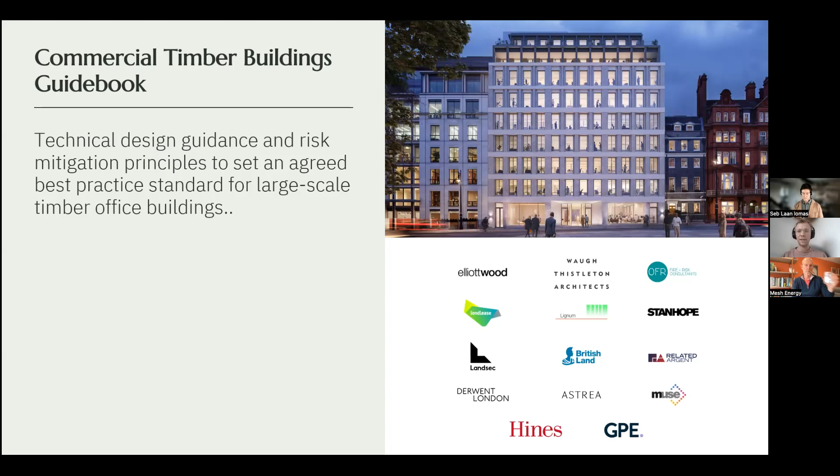What's the timeline for the project, Joe? The design team are currently writing the first draft of the guidebook, and the fire engineers are going through meetings to set out what they can agree on. The guidebook itself will hopefully be published in Q2 next year, beginning of summer. We're expecting a first draft around now, end of October. So hopefully next year that will be available to use. But the process of getting agreement and endorsement usually takes longer than expected, and this project on screen is a very good example of that.

I'll talk very briefly about this. This is something that's just been published, actually. It's the new model building guide. It takes a very similar approach to the Commercial Timber Buildings Guidebook, but we're looking specifically at residential buildings here.

This is an incredible amount of technical information and design guidance that's just been released by us. It's on our website, but it was developed by Waugh Thistleton again, with UCL, Gardiner and Theobald, and Buro Happold. Crucially, they've engaged in a process of pre-review with the NHBC, one of the leading warranty providers for residential buildings in this country. This pre-review process took the whole system through a lengthy engagement process with NHBC, and what it's resulted in is a letter of comfort from NHBC that this system, if used, will facilitate developers and housing associations gaining insurance and warranty through NHBC's Buildmark warranty system.

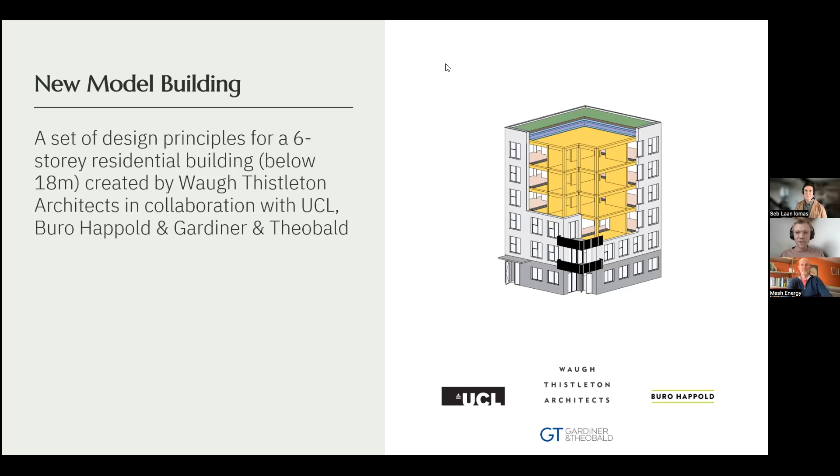Brilliant, can you see my slides? Brilliant, thank you. Okay, well, thank you very much for the invitation to come talk about this.

So I'm wearing a number of hats within the construction industry. At Architype, we've currently been undertaking a lot of research around timber and navigating the challenges that Joe just introduced. As he said, some of them were directly because of regulation, and others were because of the shockwaves and ramifications sent around the wider industry. As a representative of the design sector, we're very aware of how powerful timber in construction can be at displacing those harmful emissions that Joe introduced, and we can only do that if we have the answers to those solutions and those barriers.

And whilst there have been some really great efforts to date at challenging those, we know that a lot more has to be done still, and a lot more urgently.

So I'm going to be talking about fire resistance, which is obviously just one component of the challenge around fire and construction and timber. But the kind of challenge I'm talking about is universal across the whole of construction, across all the sector and all of the use types. It's also a materially agnostic challenge. I'm going to be talking about it through the lens of timber because it's a specific challenge and opportunity, but it doesn't actually matter what you build your building out of. A lot of the challenges I'm going to talk about are prevalent.

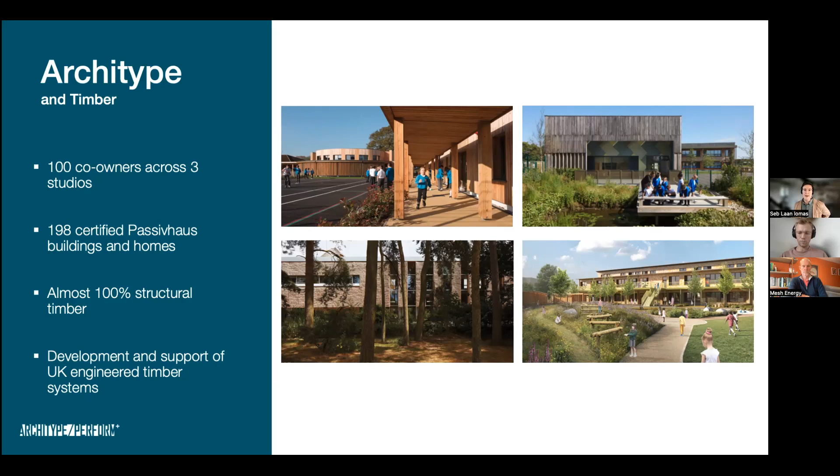Just briefly, for those who aren't familiar with Architype Architects, we're about 100 people now across our 3 studios in Edinburgh, Hereford and London, almost exclusively working on Passivhaus buildings, schools and homes. Historically and still to this day, almost all of our projects are bio-based inside to out - timber frame, either frame construction or mass timber, with bio-based insulation like cellulose, ideally local untreated timber cladding like some of the projects you can see in this photograph, or thatch, reed, and then natural bio-based plasters on the inside.

So this is my provocation of the day, and I'm going to be giving my own personal commentary on this. I've got to say, I'm an architect by training, I'm not qualified with regards to fire, but it's something that as a team we've been looking into. So I very much welcome any kind of questions or challenges after my presentation about knowledge base or anything like that, and I'm looking to learn from everybody in the industry, as I know you all are today.

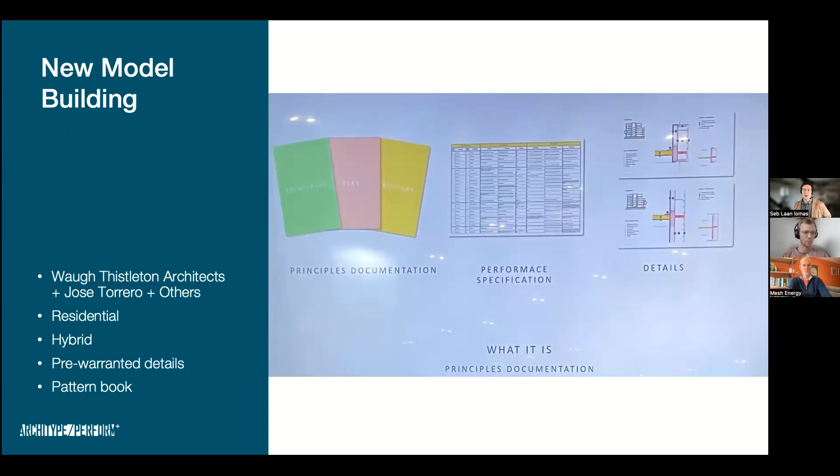So some positive progress in the industry - Joe talked about this already. I really, really recommend you have a look at it if you haven't already. It's very well communicated, very accessible, and a really good solution to the challenge at the moment. As Joe said, it's unfortunate that we do have to be encapsulating timber at the moment, but it does at least enable us to displace other materials. So it's a solution for the time being, and hopefully moving forward we can rely more on alternative strategies.

Something else that Built by Nature have also supported recently is the wonderful mass timber insurance playbook. Again, if you haven't looked at this, I highly recommend it. It's authored by 2 experts from the insurance industry, and it maps against the RIBA stages how design teams need to acknowledge the concerns of the insurance industry, and in the words of one of the authors, court the insurance market so that they can negotiate a reasonable insurance strategy for a project. It was beta tested on a mass timber school that even had quite a lot of exposed CLT, and they were able to secure insurance without a premium, whilst before this playbook existed, they were not able to afford the insurance that they were being offered by the market. So it's really good to see this in the market, and I recommend trying to deploy it on your project.

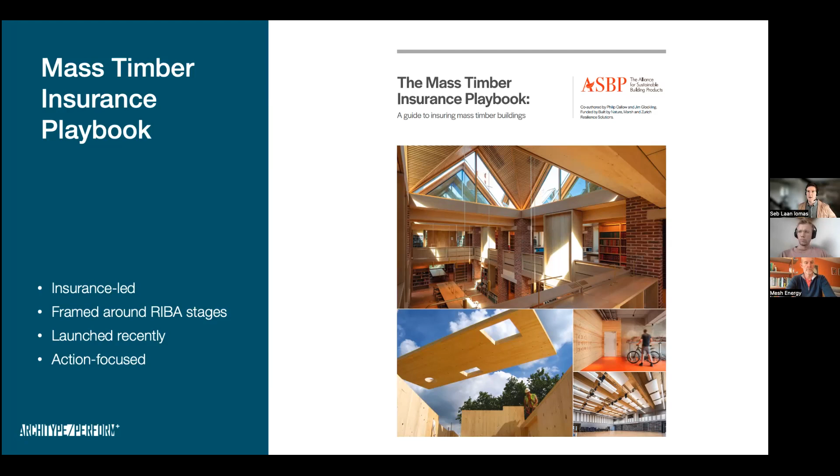And also there has been some really great testing that has been undertaken in the last couple of years, the largest of which has been led by Arup. All of this information is available online. They've got a lot of academic papers which have studied how the CLT performed in the fires, including some videos, which I highly recommend watching from a designer's kind of acknowledgement of the risks and challenges when using combustible materials. But it also positively demonstrated some really powerful successes from where encapsulation was used at preventing the combustion of the exposed surfaces.

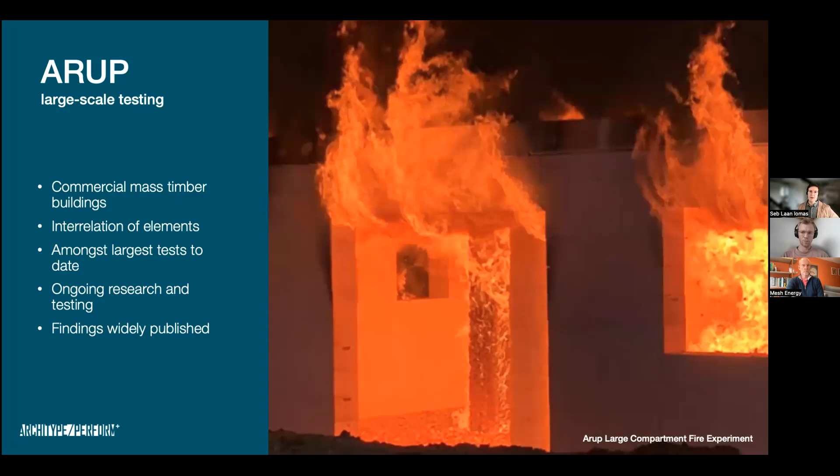So I think it is absolutely right that the construction industry has been shaken to the core in the way that it was after the Grenfell tragedy.

Joe very well explained the challenges that rippled through the industry that we're still challenged with. I think positively, the insurance market is in a better place than it was even 6 months ago, and that's really good. But it's still a significant challenge, and what I'm going to be talking about has really yet to be grappled by the construction industry, in my opinion.

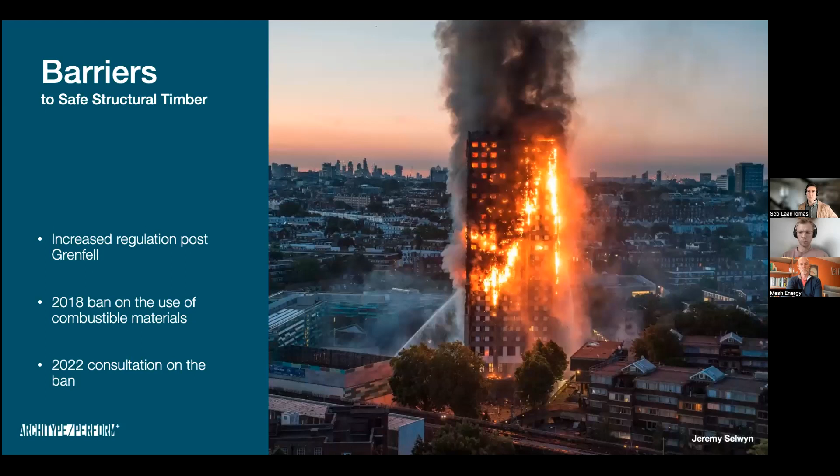So those who work in construction, I know that half on the call today are architects. You'll probably have first-hand experience of how challenging it is to get your hands on fire certificates when you're trying to design a project. And at Architype, we've learned that these REI certificates, or fire resistance certificates, are highly, highly prescriptive.

When we've gone to project engineers to talk about the challenges with achieving the FR rating they've prescribed for the project, they're typically not willing to engage with us on design matters and how we're actually going to achieve those targets. We've also found that suppliers and manufacturers can be very hesitant on disclosing the fire certificate information due to perceived concerns around intellectual property, for example.

We also know that the concrete and steel industry have had a head start on the timber industry, with 50 years of really extensive fire testing investment, which has allowed them to do more extrapolation on the anticipated behavior in applicable scenarios. So this is a bit of the context of the challenge we've been dealing with as designers.

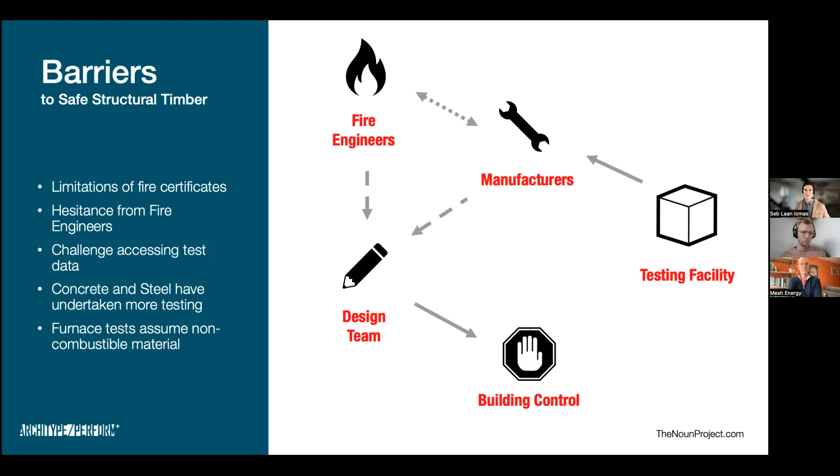Obviously, we've also had the Building Safety Act, which came into force this month. And as we all know, a really important component of that is the golden thread, to help safeguard the continuity of our design intentions and information through the long processes we always go through on our projects.

However, in my opinion, that's predicated on the availability of robust data. And our research has unearthed that the industry really is a long way from currently being able to achieve that when it comes to fire performance and certification.

I've got a provocation really as to whether England and Wales building control aspire to currently stepping up to match the levels that we've seen in Scotland with regards to scrutinizing this information. I think only time will tell if they're going to do that, because Scotland is ahead of the game at the moment.

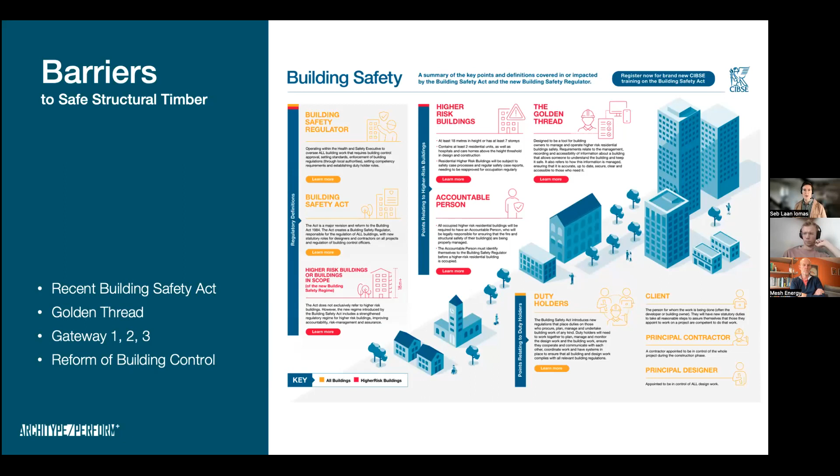So I'll briefly take you through our recent journey at Architype, which was instigated by a project of ours in Scotland. It's a 2-story primary school, timber frame, bio-based composition all the way through, achieving Passive House certification. And building control asked to actually see the specific fire test certificates, not just relying on the statements from the suppliers, which we would normally forward with project packs that we've received from suppliers.

So we requested and reviewed the test certificates that were sent by the suppliers. Some of them didn't have them initially, and it took 6 months for them to send us certificates. And then when we did look at them, it was effectively opening Pandora's box.

So I'll summarize the 18-month journey in the rest of these slides. As a practice, we know that we still don't have all of the answers yet, and we're ongoing with our research. But at least we found a strategy for moving forward at the moment, which we're confident in.

So at first, when we opened this can of worms, we thought we must have just been misreading the facts. But our findings have been confirmed. We went to everybody we knew in the construction industry and the timber industry and building control, government working groups, and our findings are correct.

And it's alarming. But as I said, it's not just timber specific. These challenges do apply if you're building out of light gauge steel or other construction materials, which is useful in one component, because it means clients can't just say, well, stop building out of timber and use another material. But it means that it really does threaten the whole construction industry.

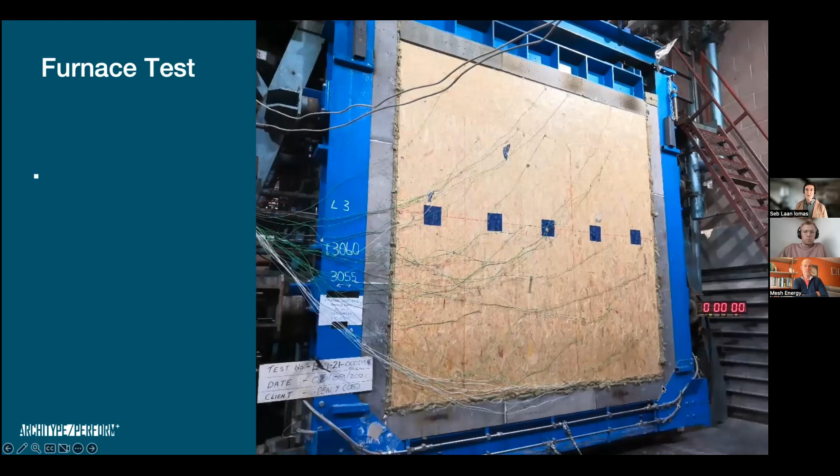And there are lots of other challenges as well. They all come with a use-by date of 5 years, after which they expire and should be reevaluated. The tests also rely on a standard temperature curve within the test chambers, and challengingly, the inclusion of a combustible material is an additional fuel source, which augments that temperature curve, leading to added complexities about the fundamental concept of a furnace test.

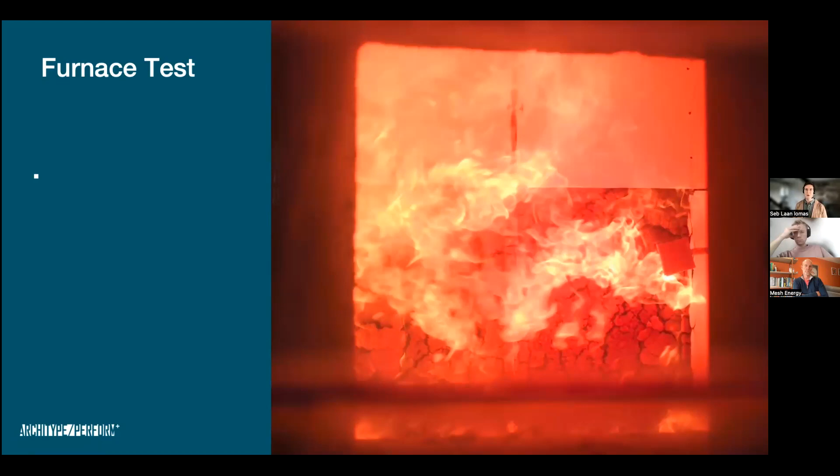And as noted earlier, the certificates are highly prescriptive. They set out the total height they can be used for, and also loading. So if you've got a domestic loading with like 12 kilonewtons per stud, and then you're trying to use it on a school or commercial building where it might be 30 kilonewtons a stud, you can't do that.

It's no longer working within the parameters of the certificate. It prescribes the arrangement of the build-up, so you can't change the order of any of the elements. It stipulates the dimensions of the components, and typically they're also product specific, so you wouldn't be able to swap from one manufacturer's product to another. They come with a use by date, and frequently we found they reference out of date standards, like British standards that are no longer meant to be referred to.

And to be able to understand all of these prescriptions, you actually need the original test certificate rather than just a guarantee from the manufacturer that it's going to be okay for your project. We found it can be exceptionally challenging just to get that information from the supplier or manufacturer. Sometimes they come with NDAs that we have to sign, which means we can't share it with anyone else in the design team or the client.

But there are some really good examples in the industry. The STA has been undertaking extensive testing regimes on some build-ups, which is available to its members, which is really positive. Because they've undertaken a range of tests using lots of different suppliers' plasterboards, for example, they've actually got product agnostic certificates, meaning you can use that build up without needing to sign up at stage 2 or stage 3 as to who's going to be supplying your plasterboard. But those are much more expensive to commission, so in general they don't exist.

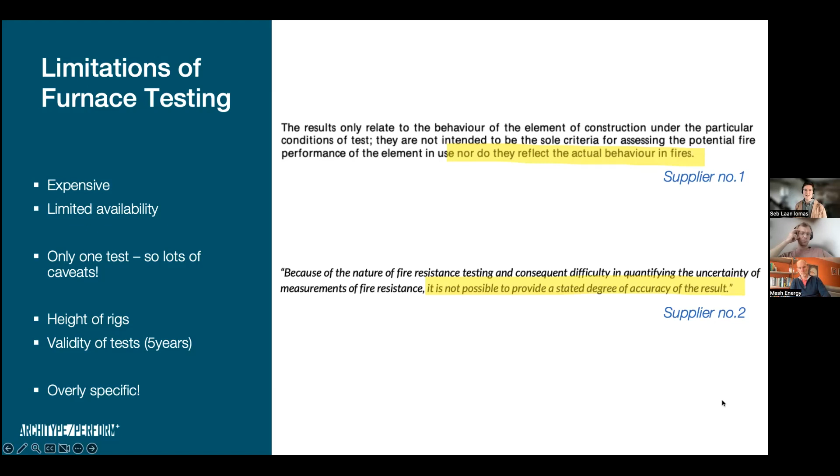So we've found that at the moment, in general, UK projects proceed on the basis of these certificates with all of these variations against these prescriptions, knowingly or not. And therefore, there's a huge amount of inherent risk being carried in projects.

So if you've got those variations and you want to do something about them, one of the options is desktop assessments. These are used to demonstrate the acceptability of those variations against the certificate or not. In general, these are infrequently commissioned by project teams because firstly, your construction detail needs to be based on an original certificate, which means you also need that original certificate. The assessment is then done by a certified fire test lab, and it costs around £5,000 and 6 weeks per detail that you want to look at.

And in Scotland on this project, they had 3 details that they wanted us to demonstrate. Also, the findings are a qualitative judgment on variations, not calculation based.

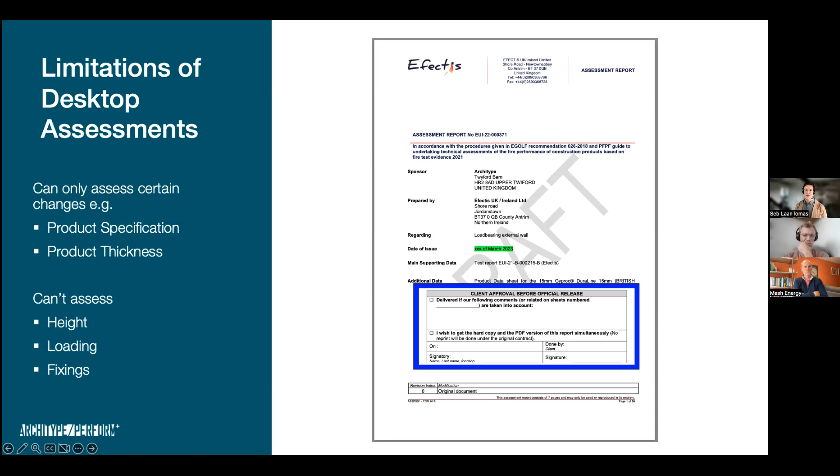So you've still got inherent risk there, and they may or may not be accepted by building control authorities. Fundamentally, they are unable to address a few key variations. It cannot comment on height changes. So if you're trying to build 4.5 or 5 meters, which might be in your stairwell or a double height space or a ground floor in any office building in London, it can't comment on that. And if you're changing the loading, it can't comment on that.

So in our opinion, it doesn't offer a satisfactory resolution for a project. So those are two options which the industry does use. The second, not as frequently as the first, but there is an alternative school of thought, which I'll refer to as calculation-based. Some refer to it as one aspect of performance-based. And this uses real-world material properties and real-world fire test data.

And guidance for doing this is offered via Eurocode 5 or the British Standard 1995 1.2. It can avoid the need for commissioning any furnace testing, provided sufficient data exists. But there are also restrictions with the current applicability of Eurocode 5 in the UK. This is being revised at the moment, and that may restrict the acceptance of it by building control and your insurers. We found it to be okay, but just to note that. There's an update of Eurocode 5 in the works at the moment, which is seeking to get greater acceptability of this standard within the UK.

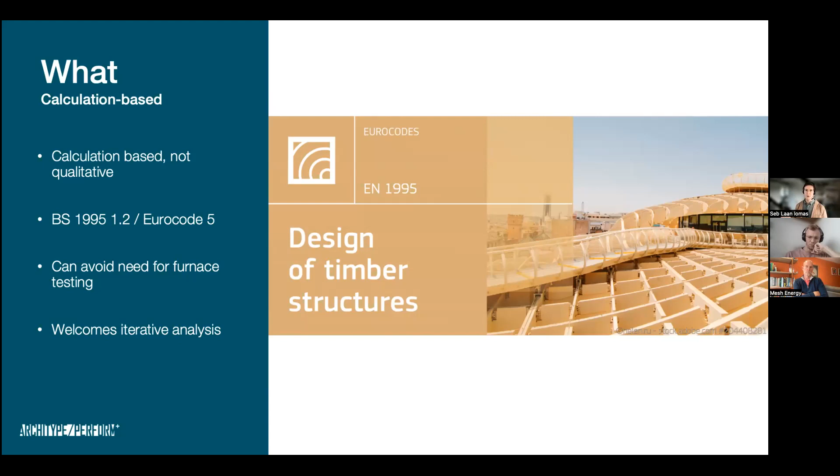And importantly, it allows for iterative calculations during a project. So you can do the first calculation at stage 2 or stage 3, got your details, you know it's going to be okay. And then at stage 4, maybe you're speaking with a subcontractor and they're suggesting they want to change the order of something or change the material specification. You can rerun the test and demonstrate if that's going to be okay or not, which is hugely, hugely powerful. So it's a prevalent process on the continent, relatively new to the UK.

Internally, we've developed this flowchart, which represents the different stages of how a model is created to represent the original test data, known as the validation process. And then the model is amended to represent the design intent, what you're actually going to be doing, and that's known as the verification process. The calculations then demonstrate if the proposed solution achieves the required REI durations, and also by what margins, which is quite important.

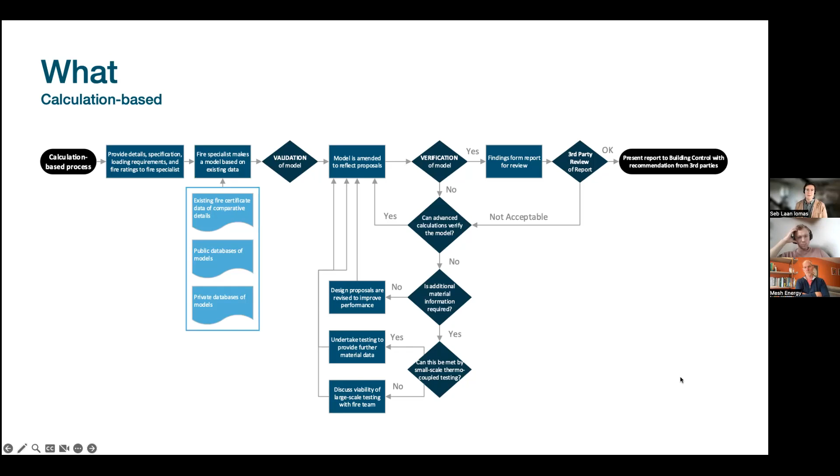And it can result in material generic solutions, which would allow you to swap out different supplied materials at a later stage, which we think is hugely beneficial to the industry and procurement processes. So we've now undertaken this process for the school that I mentioned. We're really satisfied by the outcomes of it and the robustness of it, as are the client and also building control. We're confident that we can efficiently implement this workflow on future projects.

Interestingly, all of the details, which were typical details from all of our previous projects that we keep on developing, they were all demonstrated to overperform from a fire perspective by such margins that optimization could actually be possible to reduce the amount of materials that we're using while still surpassing the required fire resistance, which is really positive. And you wouldn't normally get that with a normal certificate route or a desktop assessment. And positively, our PI insurers are also happy with the workflow that we've developed, which is a really, really good sign.

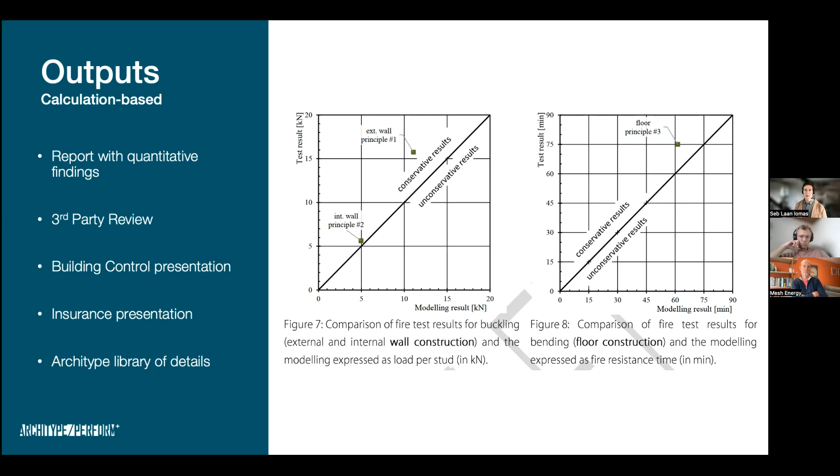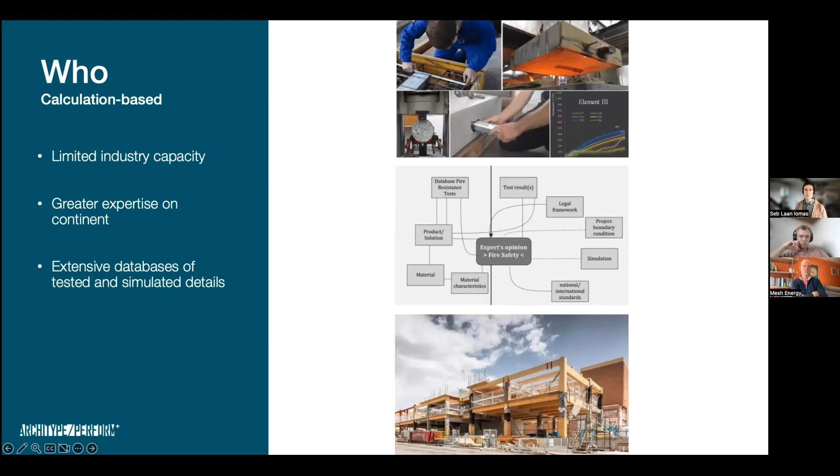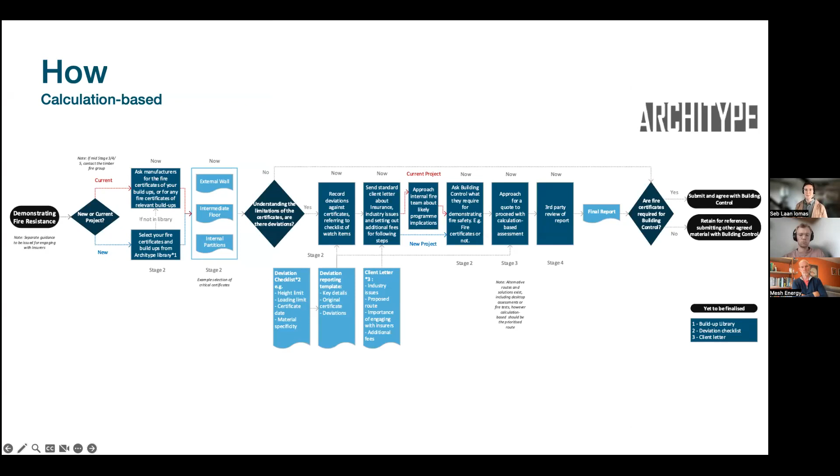And obviously vital. A significant challenge at the moment is that there are limited professionals in the UK with sufficient expertise to do this, which is an industry bottleneck. We undertook a lot of interviews with UK fire experts, quite shocked by the findings and some of the feedback from them. So if you actually want to do this, look to the continent where they have more expertise and development in this approach. And this is a workflow that we also had to create to communicate to all of our design teams about how we're going to be implementing this. And we're also developing a similar one for working on retrofit projects.

So we're really lucky to have found a satisfactory and robust process for all of our projects. We did not want to be another one of those companies which has to swap designing in timber to designing in concrete and steel for all of the reasons that Joe very eloquently put forward beforehand. But we fully understand the issues of the certificates that present here, and few have really got to grips with that in the industry. There aren't enough skilled professionals to deliver the calculation-based process I've talked through, and not every project can or will be able to fund the program allowances that this workflow requires.

It cost less than doing a furnace testing, but it did cost money and it did take time. So it's not going to be a nationwide solution in the imminent future. These are fundamental threats to the whole industry that need to be addressed, but it could be an opportunity for the timber industry if it embraces these and gets the information together to help the construction industry through this process, which ultimately is what the Building Safety Act is calling for.

So as a reminder, the challenges I've explained are not just timber specific. That's really important to understand and take away from this. But if we don't deal with this, it may well be that more and more projects move towards steel and concrete, where more fire data exists. And it's not just a challenge for structural timber either, but also harvested wood products like cellulose insulation, which we know are a massive opportunity for the retrofit emergency.

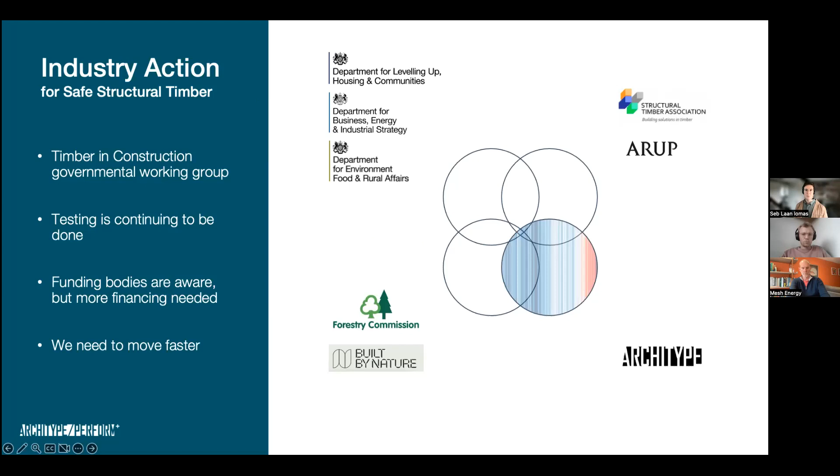And then Seb, when you talk about some of the other stakeholders and other bodies doing the work, I believe there's a cross-party, all-party report that's gone out from the timber construction industry. Is it the Timber Construction Barriers and Solutions report? Is that something like that? Is that working in tandem with, say, the new model building? So there seem to be different reports pushing the use case of timber coming from different entities and different bodies.

Yeah, so positively, a couple of years ago, I don't know if it was a year or a year and a half ago, there was a timber in construction working group that was brought together by government parties, but also stakeholders from the timber industry. And it accepted that you have various government policies advocating for getting more timber in construction and for supporting forestry in the UK for loads and loads of reasons. And yet you had other policies which were prohibiting that, as Joe mentioned earlier, and others.

And so there was a concerted effort to say, okay, let's get all the heads in one room. Where are all these mismatches? What does the government need to take responsibility for in addressing those? And what does the timber industry need to do and take responsibility for in addressing those? And also, what can we do together? Where do we need mutual support and alignment for breaking those barriers and making it easier to get more timber safely into construction?

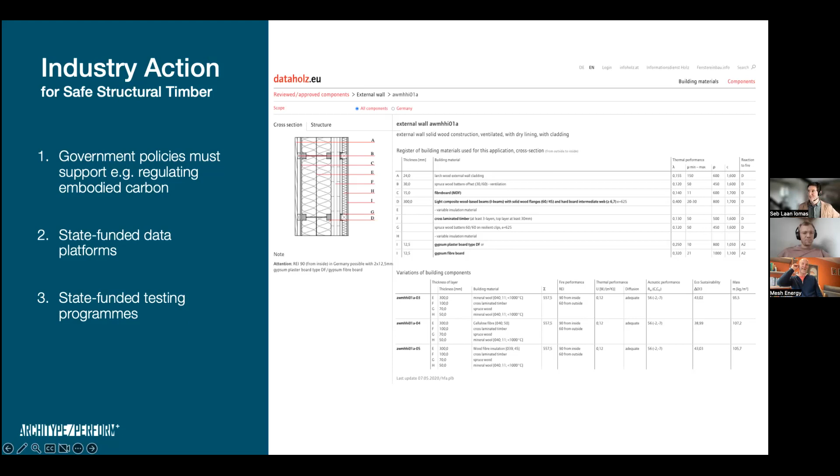Yeah, I was going to reference why the use of timber in the UK is so low, but you've outlined many of the challenges there. And then also when it comes to the role of MMC and timber, that seemed to be key, but that business model is struggling at the moment, with the likes of Ilke Homes etc. Even on the smaller scale, who's going to be delivering it?

And Joe, I know you wrote an article in the Architectural Review calling for less demolition and looking at how we can repurpose existing buildings etc. One of the other challenges, at a basic level from what I can see, is that the planning community isn't aligned either. Because in order to retrofit many buildings, the planning community wouldn't even allow it. So it's not joined up at all, is it?

So you're calling for mid-rise as a maximum, which makes complete sense - stop building and convert, don't go beyond mid-rise. It sounds amazing, but there are so many challenges, as Seb's just spoken about, especially with planning. So what kind of feedback did you get from that article? Were there any positive suggestions?